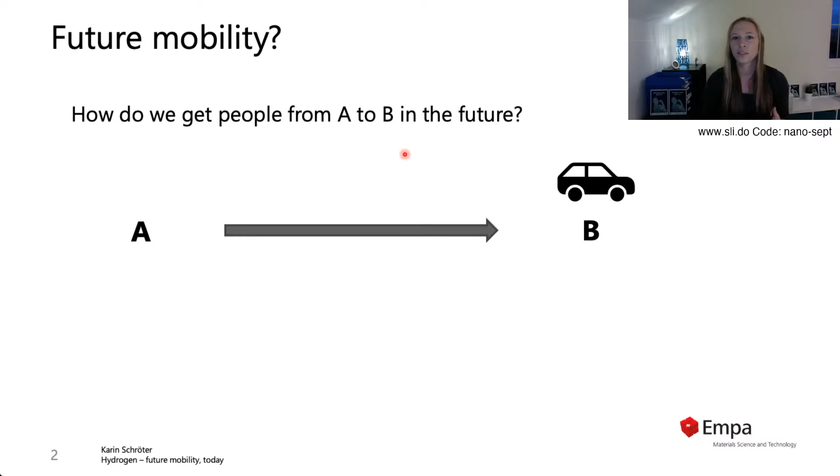And welcome to all of you to the nanoTalk about hydrogen and future mobility. And when I talk about future mobility, it's a broad topic. I mean, how do we get people from A to B in the future? And that's also still a broad topic. And we have on the one side the social stuff, and also will we use artificial intelligence for driving, car sharing, will we use self-driving cars, public transportation, and all this stuff on the left side.

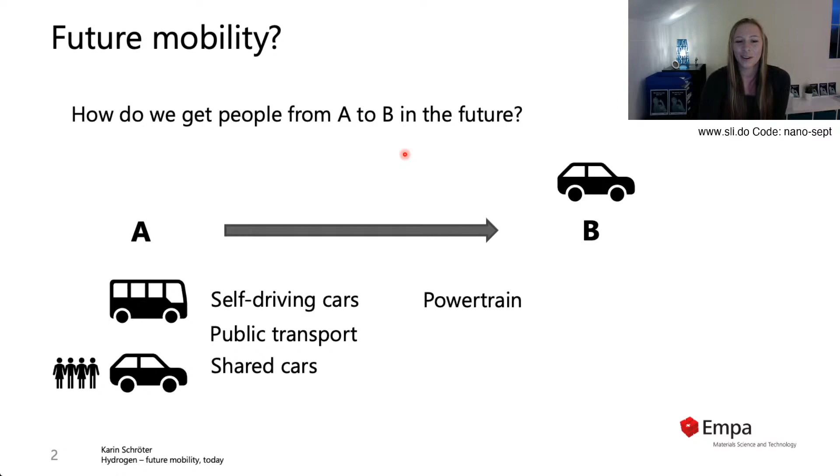When I talk about future mobility as an engineer, I think about the powertrain, and with this, the most common topic now is how do we get them CO2 neutral. So, for example, if you drive an average gasoline car, you produce 13 kilograms CO2 per 100 kilometers. So that's a lot of CO2. And there are approaches to reduce them with hybridization, or also approaches to really get CO2 neutral.

And the first one that's always mentioned is the battery electric vehicle. And with this, you are CO2 neutral because you don't have direct CO2 emissions. And when you have solar panels on your house and you only drive short ranges, you are CO2 neutral. But on the other hand, this technology has also disadvantages like the short ranges in general, then the long refueling, or in this case recharging time, and for everyone to really drive a battery electric vehicle, you would need infrastructure with a whole lot more renewable energy and charging stations. And this is very complicated.

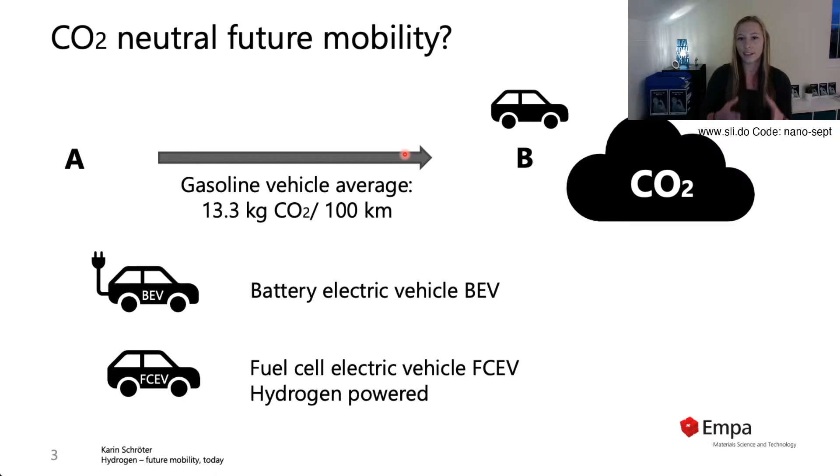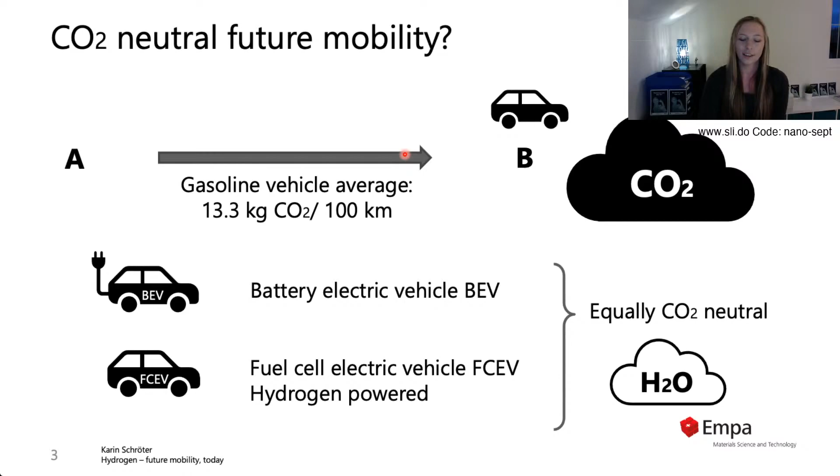So the other possible opportunity to go CO2 neutral in the powertrain system is to go to fuel cell vehicles. And these vehicles have electric engines powered by fuel cells that are powered by hydrogen. And with hydrogen, you only get water emissions. So for the instant emissions, you are equally CO2 neutral as battery electric vehicles.

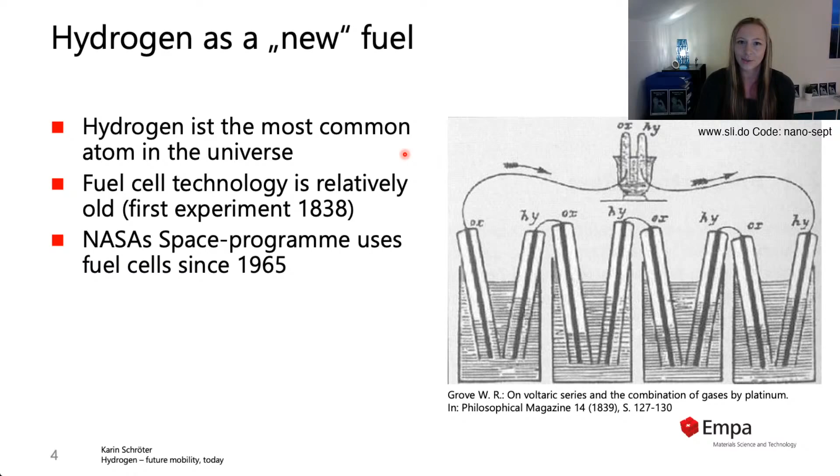Hydrogen itself is the most common atom in the universe. This means it's all around us, but not as pure hydrogen at the moment. So the technology of fuel cells is also very old. The first experiments happened in 1838. And for example, NASA uses fuel cells from the 1960s up till today as the main power source for their space programs. And also in transportation, like public transportation, there were first prototypes of fuel cell vehicles in the 1990s.

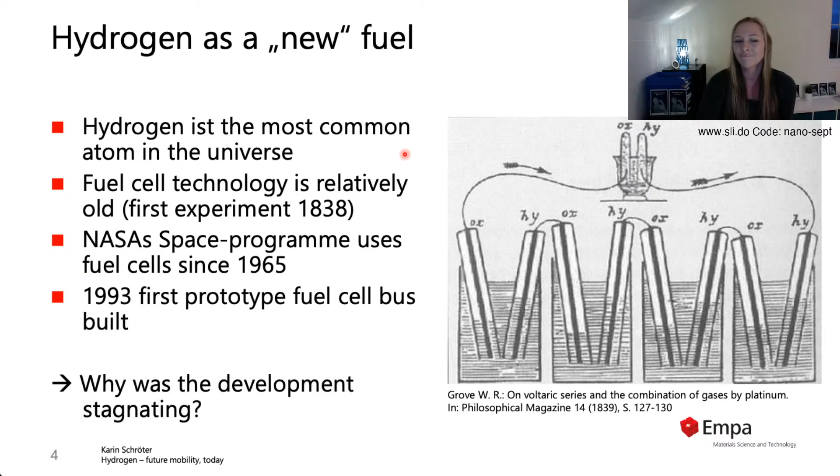So this technology was there about 30 years ago, and since then there was a lot of research on fuel cells and hydrogen production, but it has not had this hype. And this is simply because there are cheap and easily accessible alternatives like oil or methane gas, and they always kind of let the hydrogen hide itself. Also, hydrogen needs proper handling. To put it simply, it's a very small molecule, and because of that, it's very diffusive.

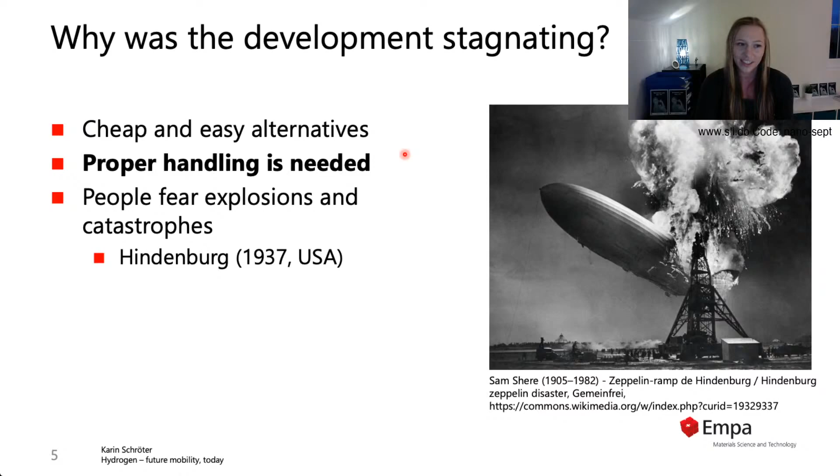And also it's very explosive. And when people think about hydrogen, their minds always blow up. They think about explosions, like for example the Hindenburg, or also a topic that's always mentioned is the hydrogen bomb, which has nothing to do with hydrogen in the mobility sector at all. As I said, proper handling is needed, and today we can really do that to an extent that hydrogen is as safe as gasoline.

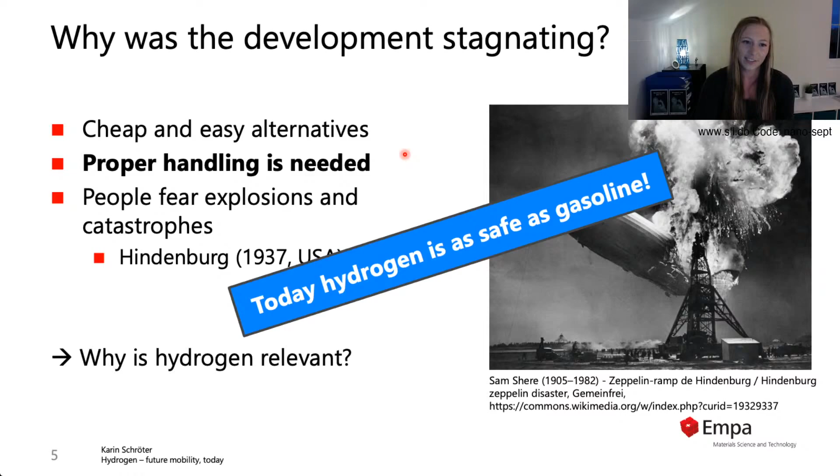But when you change from a conventional vehicle to a hydrogen vehicle, you don't have to adapt that much, as you have nearly the same range, nearly the same fuel price for one refueling, and also a similar refueling time compared to gasoline vehicles. So that's a very good advantage compared to battery electric vehicles.

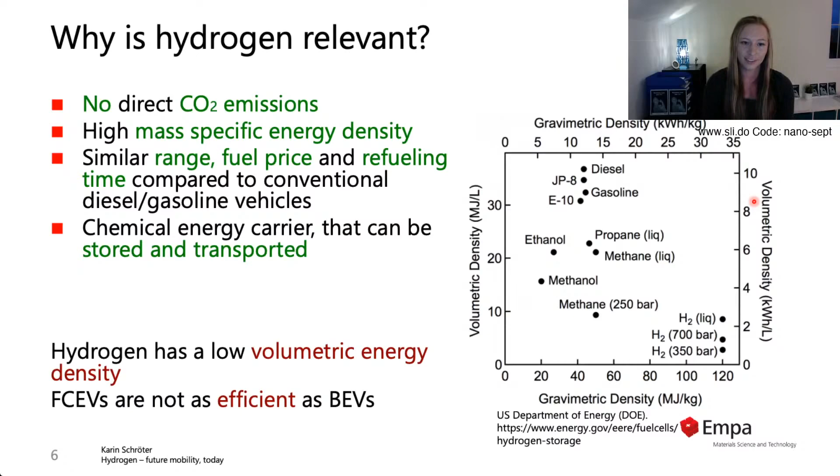And also hydrogen is a chemical energy carrier. This means it can be better stored and more efficiently transported than electrical energy. On the other hand, the whole hydrogen process in mobility is not as efficient as the battery electric vehicle. But with renewable energy, we still are CO2 neutral.

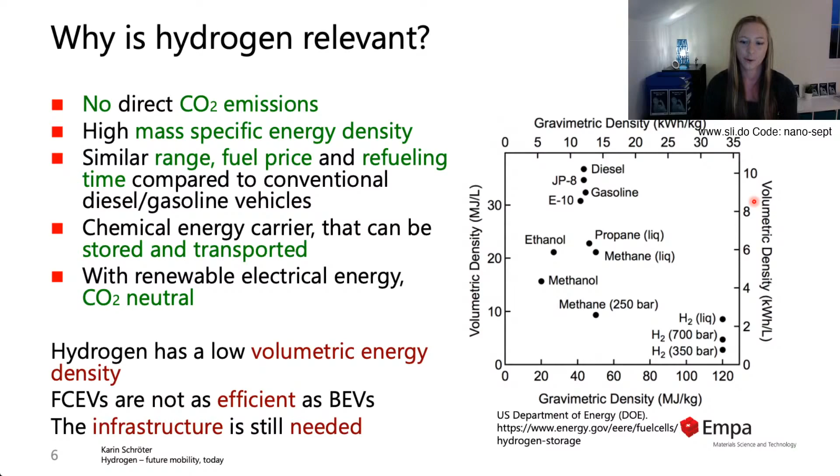For this whole thing to really happen, so for hydrogen future mobility, we need the infrastructure though. So it's similar to battery electric vehicles. We don't have the infrastructure yet, but we need it to go forward. And speaking of infrastructure, here you can see the move. That is the first hydrogen refueling station in Switzerland, built in 2016. And I will show you how we brought this whole thing of producing and refueling hydrogen to Switzerland.

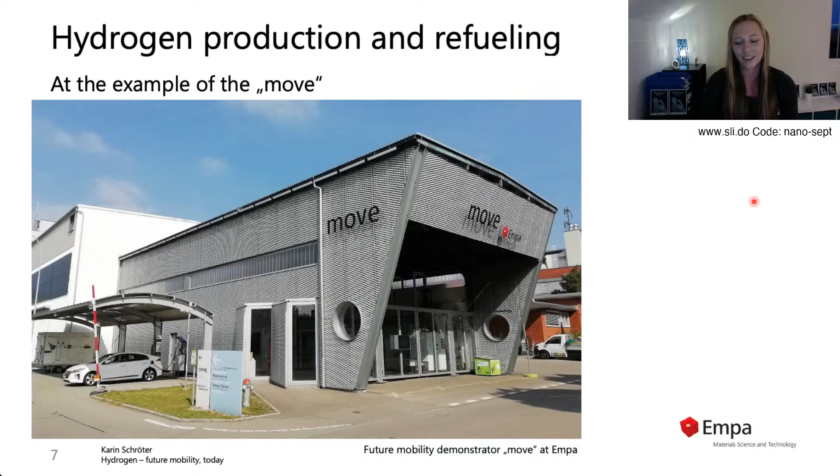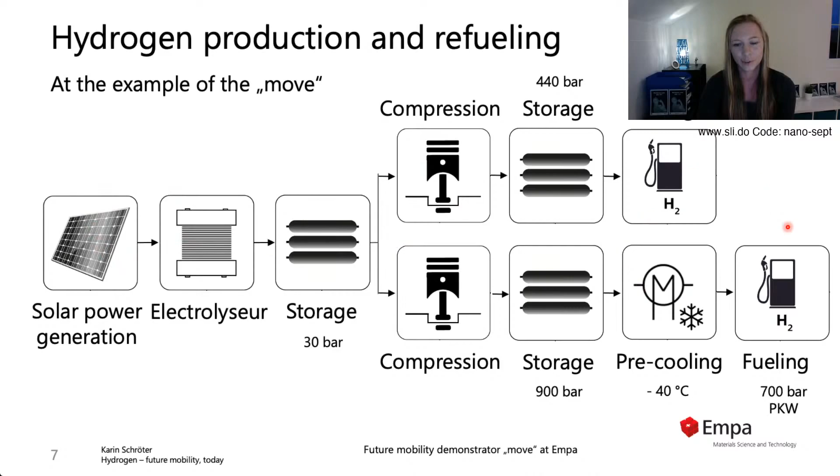Here you can see this whole process from the start, from the production to storage to the refueling. And we go through it from the start. We start at the hydrogen production, as I said. And in our case, we produce hydrogen with electrolysis. And this has an efficiency of above 50%. So it's still very efficient, but it's not as efficient as if you would directly use the electrical energy. And all our electrical energy is produced renewably.

For everyone that is a little bit unsure what electrolysis really is, it's the process of dividing water into hydrogen and oxygen with an electric current, and also a membrane that separates the cathode from the anode. So in our case, it's a proton exchange membrane, short PEM. And this is the reverse process of the fuel cell. So in this case, you put electric energy inside of it, you get hydrogen out, and the fuel cells put hydrogen and oxygen in and get electrical energy out that fuels the electric engine.

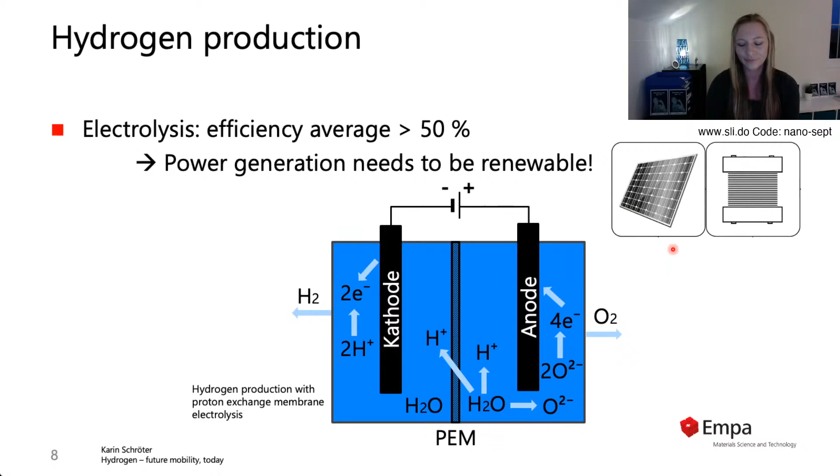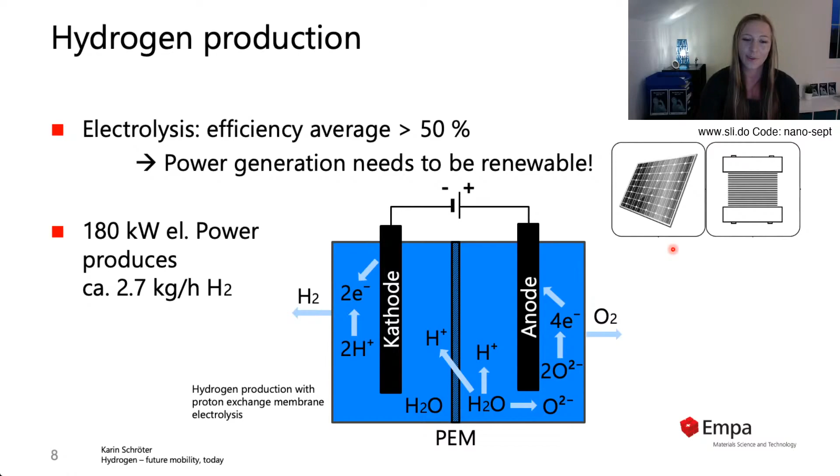In the move, we have 180 kilowatt installed electrical power electrolysis. This means we get about 2.7 kilograms hydrogen per hour out of this system. And when we have them, we need to store them. And as you see, it's not that easy, and this is because hydrogen has a very, very low density.

When you have normal conditions and you want to store 1 kilogram of hydrogen, you would need 11 cubic meters for this. Or the other way around, if you would have a tank with 1 cubic meter, you could only store 90 grams of hydrogen. Our electrolyzer produces hydrogen at 30 bar, so we can reduce the needed volume a lot. But for vehicles, this is still too much volume.

And so currently the trucks are using hydrogen at 350 bar, and the passenger vehicles use hydrogen at about 700 bar. And in our system, the highest pressure is 900 bar, because we fuel only because of the pressure difference from our tanks to the vehicles. And with this 900 bar, we can reduce the needed volume from originally 11 cubic meters to 0.02 cubic meters, which means it's about 0.2% of the original volume.

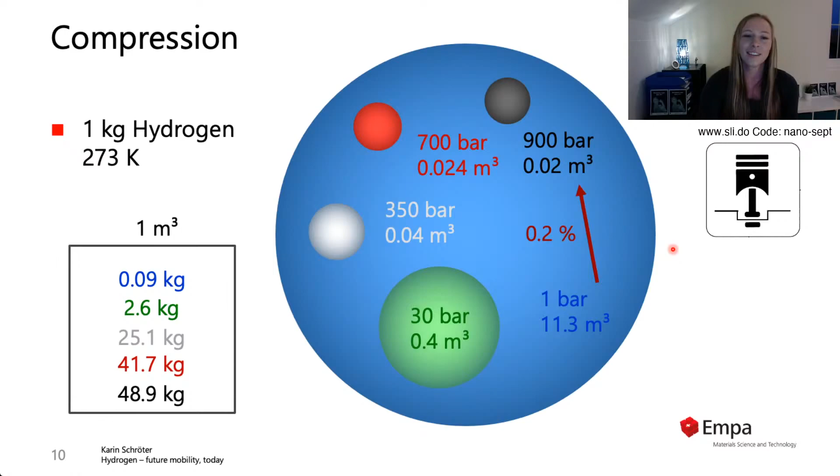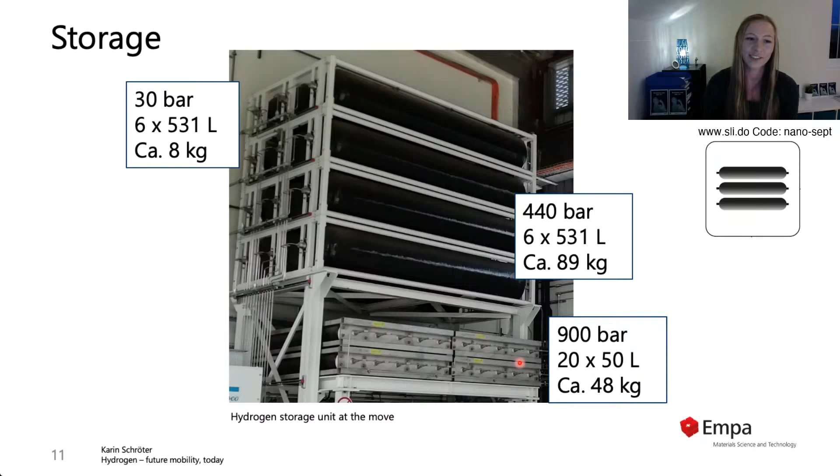But not every material holds this pressure, especially with hydrogen. So we have composite material cylinders. This means we have a polymer inlay and carbon fibers around them. And here you can see there are 12 tanks. 6 of them are filled with 30 bar and 6 with 440 bar. And we have our high pressure stage here. These are 20 cylinders with 900 bar. And this whole thing has about 7 cubic meters and 150 kilograms of hydrogen stored in this small volume just because of this pressure.

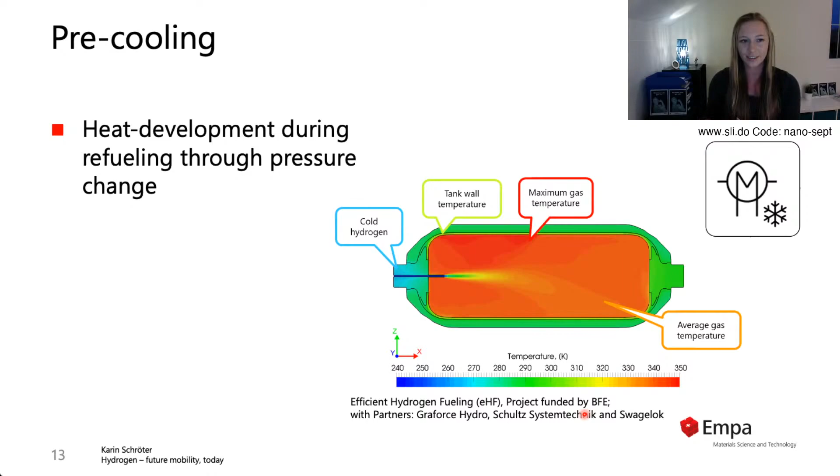As I said, we go from the storage to the refueling, but first we have another problem to solve, and this is the pre-cooling step. Because of this pressure change from the 900 bar in our tanks to our vehicle tanks that have a lower pressure, we have a heat development, and this can be up to 100 kelvins in one refueling. So our vehicle tanks can only handle about 80 degrees Celsius, so we need to pre-cool the whole hydrogen to minus 40 degrees before we can really put it into the car to avoid damage. And there are a lot of simulations and projects about this whole hydrogen refueling and heat development in these tanks.

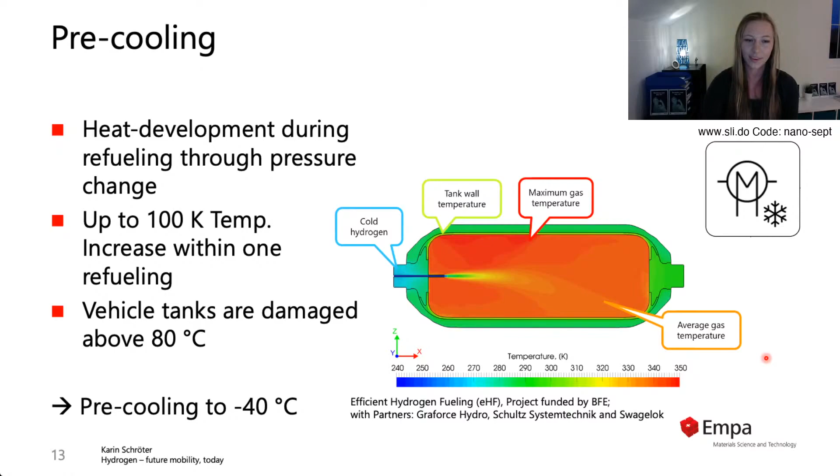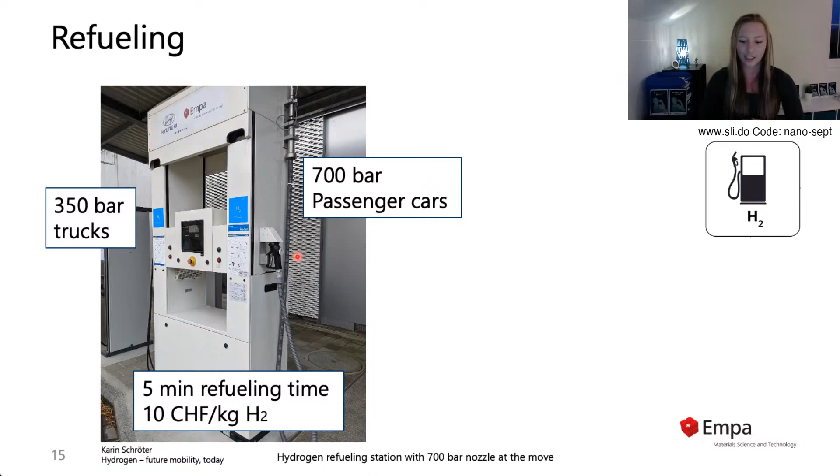Now, from the pre-cooling to the fueling, we have, as I said, 2 refueling stations, or it's one. On the one side we have the 350 bar, and on the other side 700 bar. And with this setup we have about 5 minutes refueling time and sell the hydrogen for 10 francs per kilogram. In a normal passenger car they fit about 5 kilograms. And I really wanted to show you this nozzle here, because I think that's the most interesting part, because everyone always thinks it's something strange or from the future, but it looks not that technically challenging.

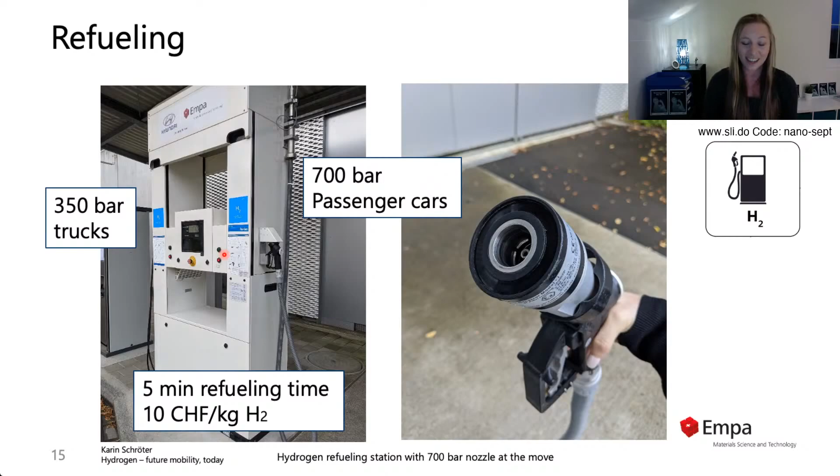It has an infrared sensor around the gas channel, and when you couple it to your vehicle and you press start here, the whole thing first checks if the pressure is right, if the temperature is right, and if there is any leakage. And only if everything is okay, this whole process starts. And so you don't have to fear when you stand near a hydrogen refueling station that something is going out and blowing up.

As I said, this is the process we have in the move, and it consists of hydrogen production, hydrogen storage, and hydrogen refueling with pre-cooling. And now the problem is, this technology is very new, so these technologies are needed, but every hydrogen refueling station has them to a different level or uses other process steps or other technology. So you cannot say every refueling station looks exactly like ours. Some only have one pressure stage, and some get the hydrogen transported over a little bit of distance. And this is only the one we have, but the technology we have is really the one that is needed for hydrogen infrastructure.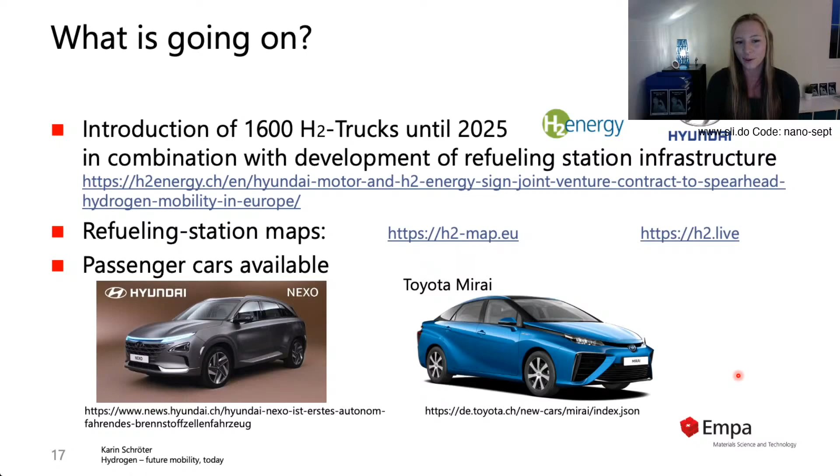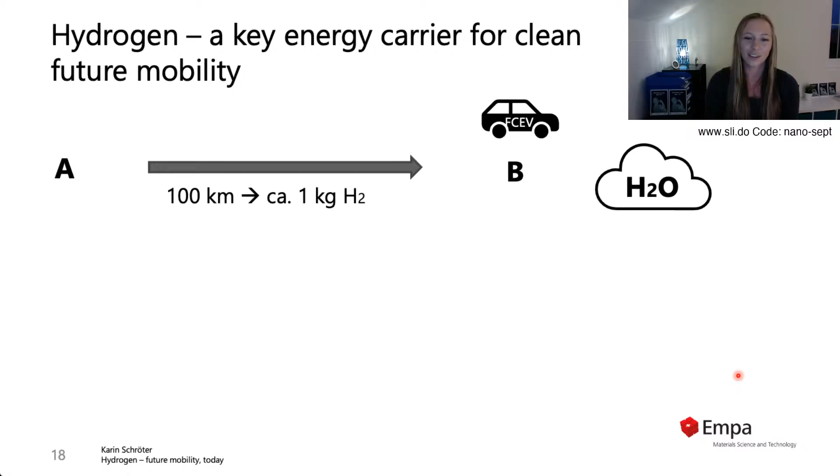And when I say future mobility, what I think about is I hope some of us can in the future drive with hydrogen, producing only water in this process, because it is a CO2 neutral alternative if we really implement this infrastructure.